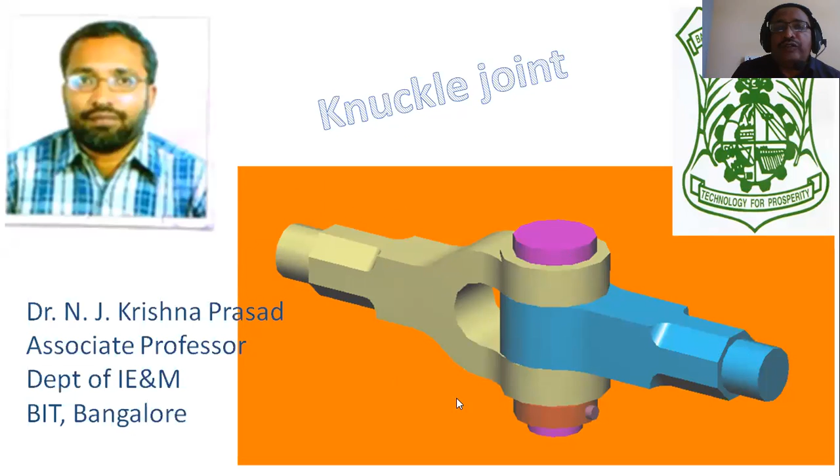Today I am going to explain how to draw the orthographic views of the knuckle joint. The cover page I designed here is the knuckle joint, and the pictorial view of the knuckle joint is shown here.

Knuckle joint is used when a small amount of angular movement is necessary for the two rods. One end of the rod is forged in the form of a fork end, having a hole in both the arms of the fork. The end of the other rod is forged forming an eye end. The eye end of the rod is inserted into the fork end of the other rod, and a cylindrical pin is inserted through the aligned holes in the rods.

The pin is held in position using a collar and a taper pin. Knuckle joint permits the rod to rotate freely about the pin. Knuckle joint is used in air brake mechanism in locomotives, and the reversing gear of a steam engine.

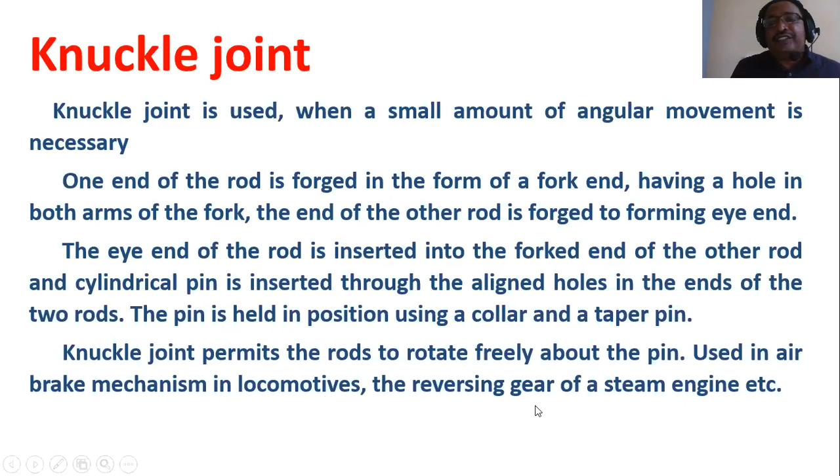The different parts of the knuckle joint are shown here. This is the fork, this is the eye, this is the pin, collar, and a taper pin. The eye is inserted in between the fork arms, and the pin is inserted from the top, collar is inserted from the bottom, and the pin and collar are held by the taper pin.

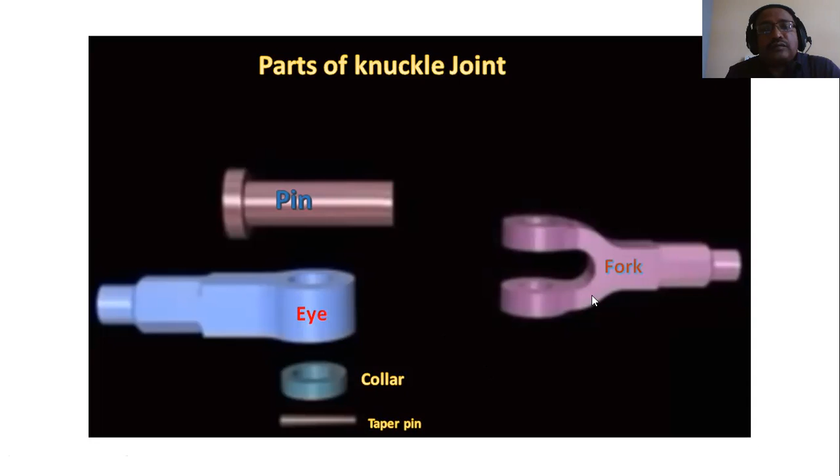If you take a MYRIAD reader, it is possible to know the size and shape of the fork and the eye. So if you understand the size and shape of the different parts of the knuckle joint, and remember the size and shape of all the parts in terms of diameter, then it is very easy to draw the orthographic view. If you take the fork here...

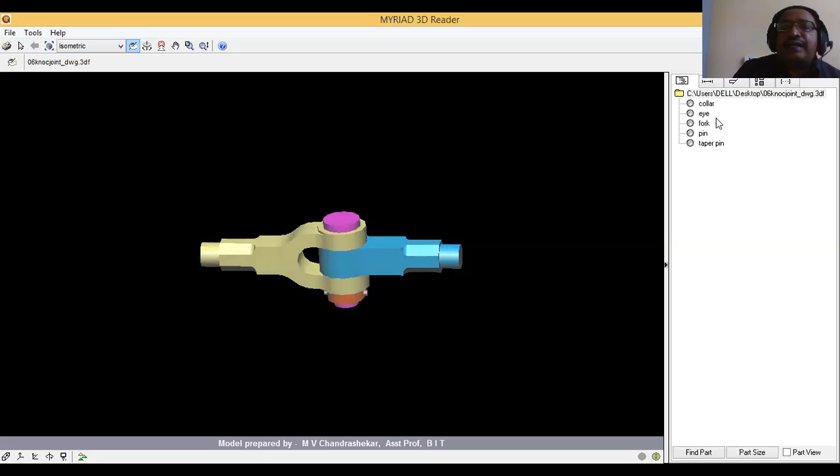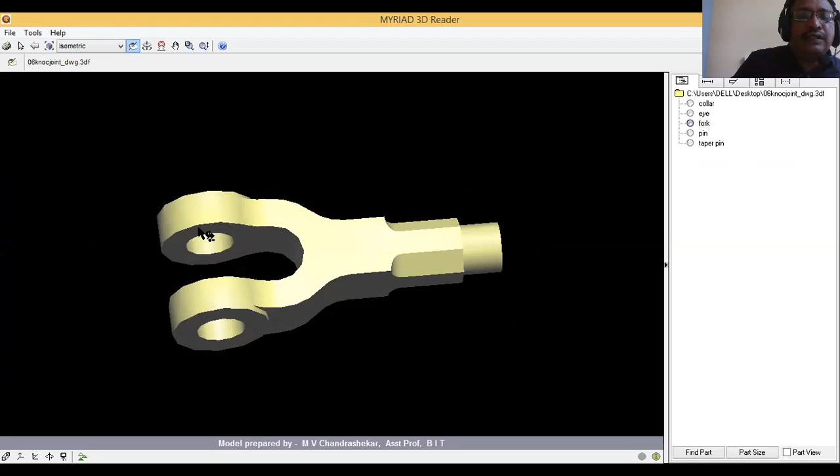When I connect the ends of the two rods, one end of the rod is formed in the shape of the fork. This fork has two arms. This I take it is in square cross section, this is octagonal section. This end is the fork end, this is the rod end. In the fork end, they have provided a through hole, and in between the arms of the fork there is a gap.

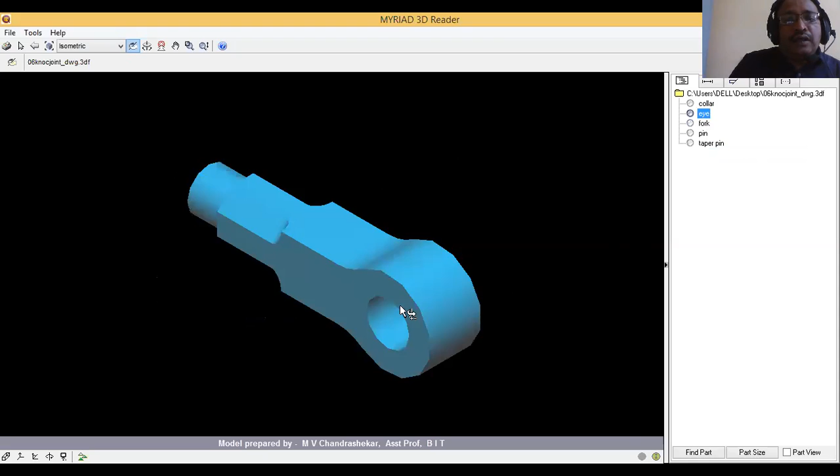If you take the eye, this is the rod end, this is the eye end, this is square section, this is octagonal section, and a hole throughout the eye is there.

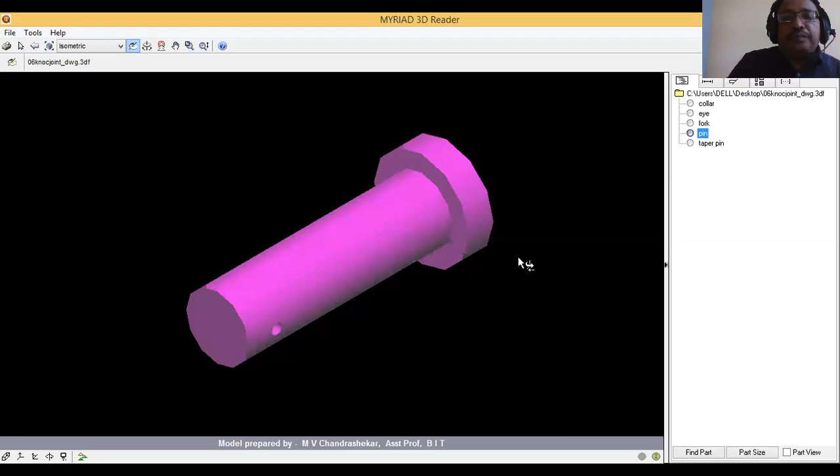This is the pin. It has a cylindrical portion here, and this is the pin head, and a through hole is provided here. Then we have the collar. This is the collar, and we have the taper pin. Taper pin is like this.

Taper pin - you should remember to find out the length of the taper pin. It is 80 millimeter long, and the taper is 1:50.

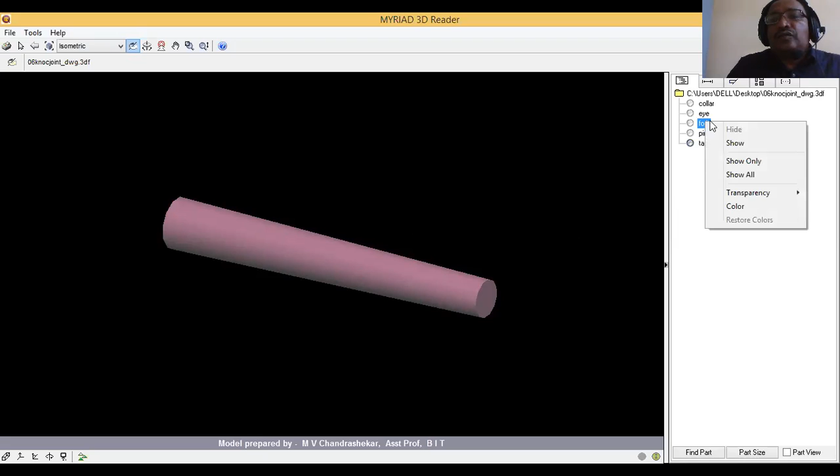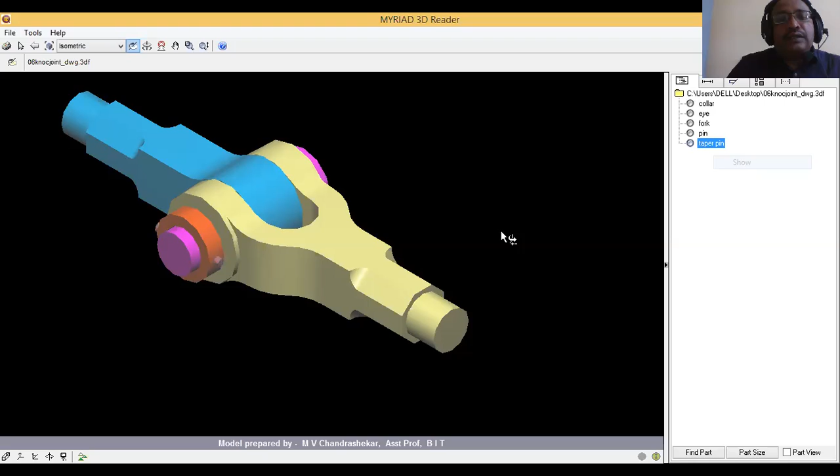After that you assemble it. Assembly is like this: fork, then to the fork the eye is inserted, and after this the pin is inserted, then the collar is inserted from the other end, then the taper pin is inserted. It completes the assembly. After assembly, it is looking like this. It is required to draw the front view.

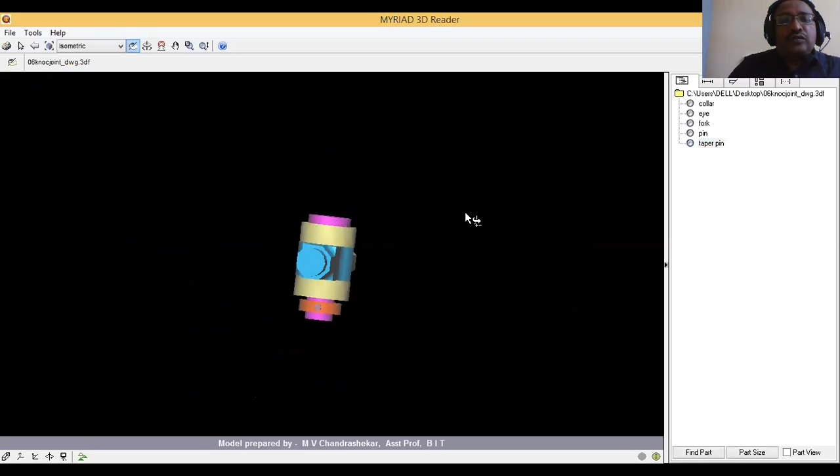It is required to draw the front view, then top view, then side view. One thing you should know, here when I draw the side view, the shape of this is octagon. How it is required to draw it, I'll explain while I take up that particular problem.

Length of the fork rod from the axis of the hole to the end of the octagonal section is represented by L suffix F, equal to 4D. 4 into 20 is 80 millimeter. It is from ear to ear. The side view of the fork is represented here, from ear to ear it is 40 millimeter. And diameter of the rod I take it is 20.

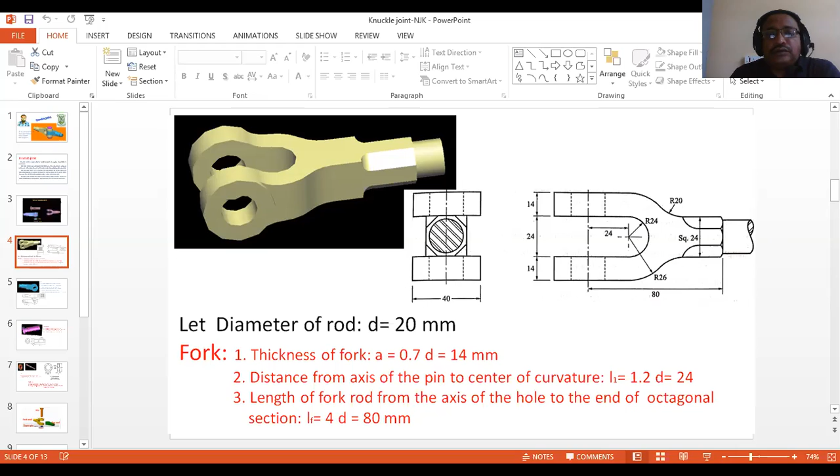Take the eye, here, this one. This is the rod end, this is the eye end. Outside diameter of the eye, ear to ear, is represented by D4. It is 2 times the diameter, so 40 millimeter. Thickness of the single eye is 1.2D, it is 24. It is represented here, this much.

Then side of the square rod - this is the square section - is 1.2D, which is 24 millimeter. Length of the octagonal section L0 is 1.2D, it is 24 millimeter, ear to ear. Then length of eye rod from the axis of the hole to the end of the octagonal section is 3.5D. 3.5 into 20 is 70 millimeter.

It is shown here. This one is the front view, this is the top view, and this is the side view, represented here.

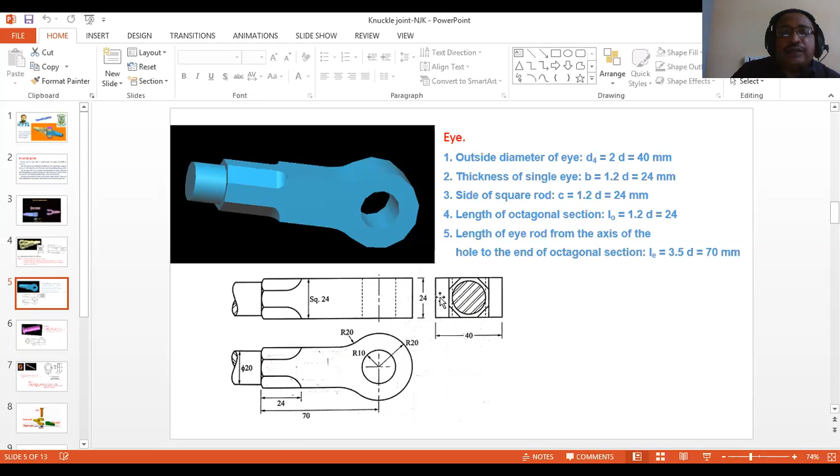And this is the pin, also called the knuckle pin. It is a pictorial view and orthographic projection of the knuckle pin shown here.

Diameter of the pin is represented by D2, which is equal to small letter d, 20 millimeters. Diameter of the pin head is D3, equal to 1.5 into D, that is 1.5 into 20, which is 30 millimeters, here.

Thickness of the pin head is 0.4D, it is 8 mm. Length of the pin, represented by small l, is equal to 3.2D, that is 3.2 into 20, equal to 64 millimeters, excluding the head.

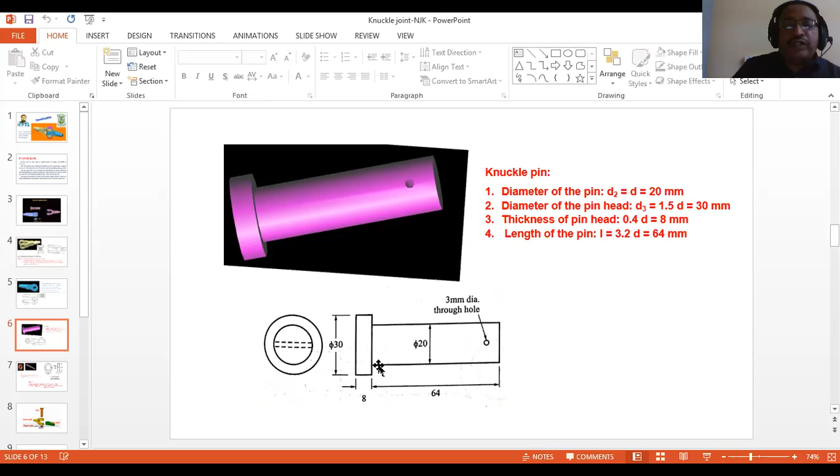Collar, outside diameter, inside diameter, thickness of the collar. The pictorial view of the collar is here, and the orthographic projection of the collar is represented here. The thickness is represented here.

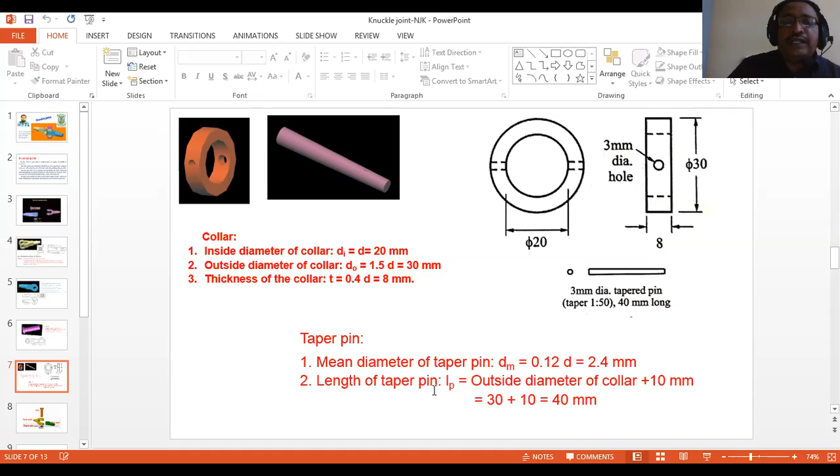And this is the taper pin. Taper pin is 3 mm and length is 40 millimeters, and the taper of this pin is 1:50. So if you know the diameter, that is the collar outside diameter, it is possible to find out the length of the taper pin. It is equal to 40 millimeters.

And here once again we represent how to assemble the knuckle joint. Fork end to the fork end, eye end is inserted, and from the top the pin is inserted from here. Then the collar is inserted from the bottom. Then the pin and collar are joined with the help of the taper pin.

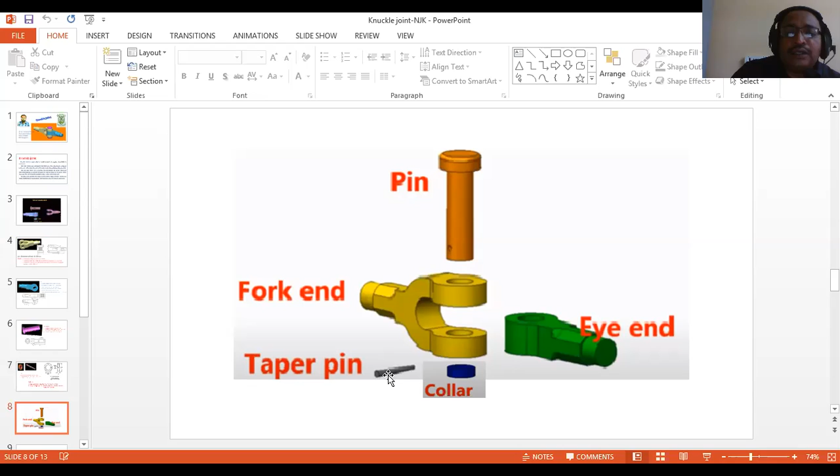And this is the pictorial view of the knuckle joint. So here we have fork to the fork, eye is inserted, then pin is inserted from the top, then collar from the bottom, then taper pin from this side.

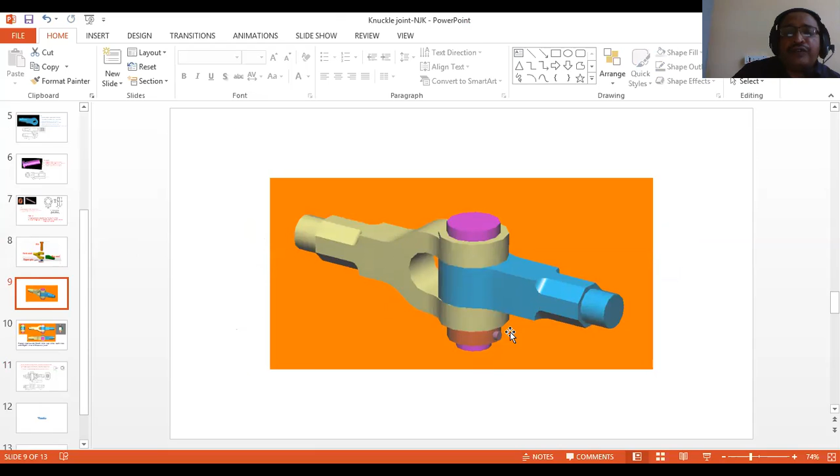And here in the examination, they ask to write two orthographic projections: one is the front view, top view, right view or left view. This represents the front view, top view, and right and left view of the knuckle joint shown here.